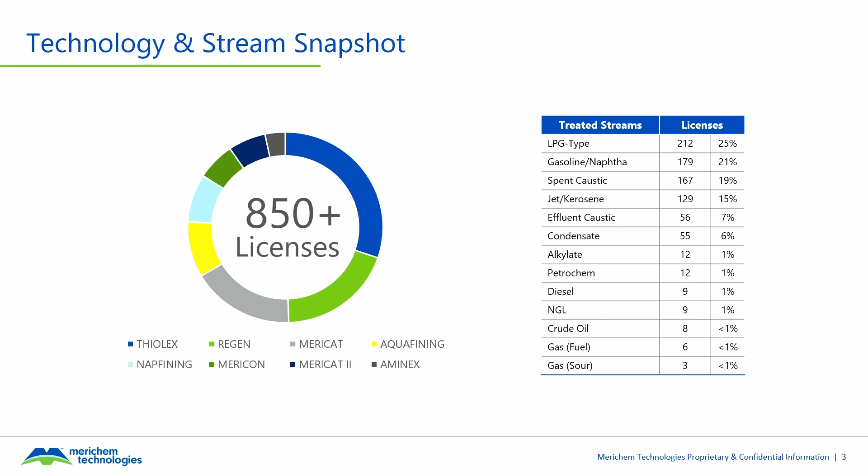To date, we have over 850 licenses spread across the world. These technologies include Thiolex, Regen, Mericat, Aquafining, Napfining, Mericat 2, and Aminex. Most of these are extraction or sweetening processes built around our fiber film contactor. Our entire portfolio consists of about double the technology that you see listed here, but these 8 are most suitable to the African continent.

Thiolex and Regen, as you can see, are the most dominant. They represent half of the licenses that we've issued to date, and they are complementary. Thiolex is going to extract mercaptans into caustic, which will then go over to the caustic regeneration technology, Regen, to regenerate it for continuous use.

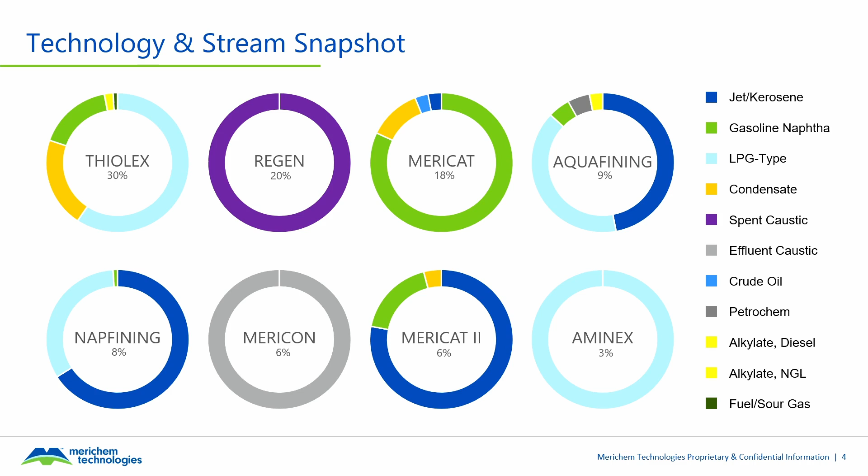We flexibly apply these technologies across 13 major feed types that you see listed here. The LPG stream is the largest share, followed by kerosene, jet fuel, gasoline, and so on. The pie charts here also show how these licenses are distributed among both technologies and the feedstocks. A key point: extraction is going to dominate in the lighter fractions of hydrocarbon, while sweetening dominates in the heavier fractions, such as jet fuel and condensate. We use aquafining on jet fuel, and Mericon is used to neutralize effluent caustics for safe disposal.

This global reach shows the breadth of adoption and sets the stage for Africa, where we believe the same trajectory of growth is possible, much like what the shale gas revolution did in the US, and now similarly 10 to 15 years later in Canada.

Okay, now let's shift gears and look at how the magic happens.

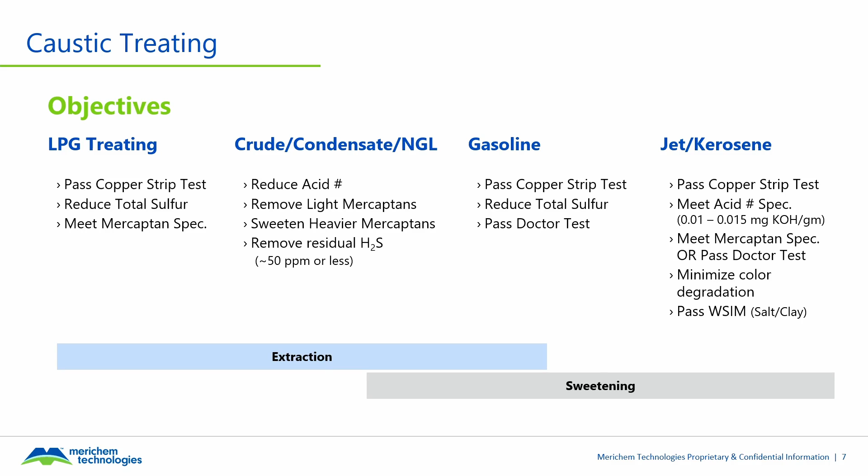Depending on the hydrocarbon fraction, the treatment objectives will vary. For LPG, the key specs we're trying to meet include copper strip, total sulfur, and mercaptans. For distillates, naphthenic acid comes into play along with mercaptans. For gasoline, we're going to touch on copper strip, total sulfur, and the doctor test. And finally, for jet fuel and kerosene, we're going to be looking at copper strip, acidity, mercaptans, and color.

As the fractions get heavier, once again, extraction alone is not enough. We must combine extraction and sweetening, and eventually rely mainly on sweetening to sweeten up the heavier mercaptans, up to and including an impregnated carbon bed.

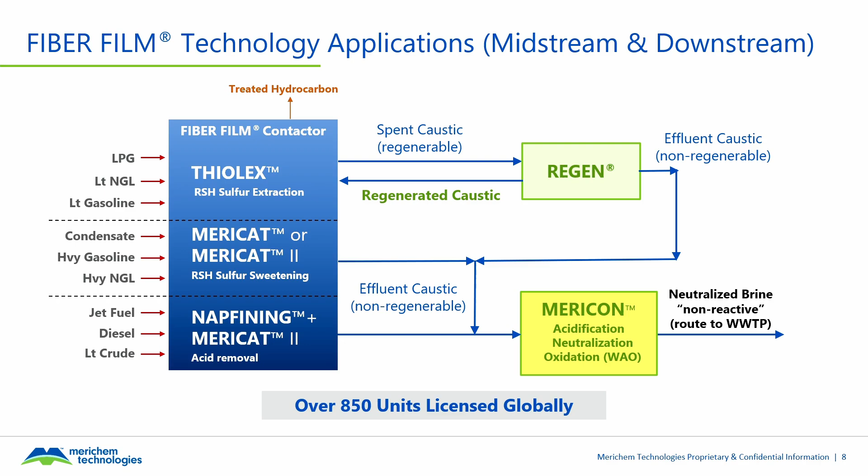Here we see a simplified refinery schematic with the typical refinery products on the left-hand side coming into the Merichem technology block. Each fraction from LPG to diesel to crude oil can be treated with our technologies.

Thiolex handles extraction in the lighter fractions. Regen regenerates the caustic that has extracted the mercaptans. Aquafining is used to remove entrained caustic, primarily from jet fuel. Mericat and Mericat 2 are used to sweeten heavier mercaptans. And Mericon is a technology we use to either neutralize, acidify, or oxidize effluent caustics.

Now hear this: Merichem is the only licensor capable of treating crude oil. So if you have a crude oil stream, we can treat it directly with the fiber film contactor as well.

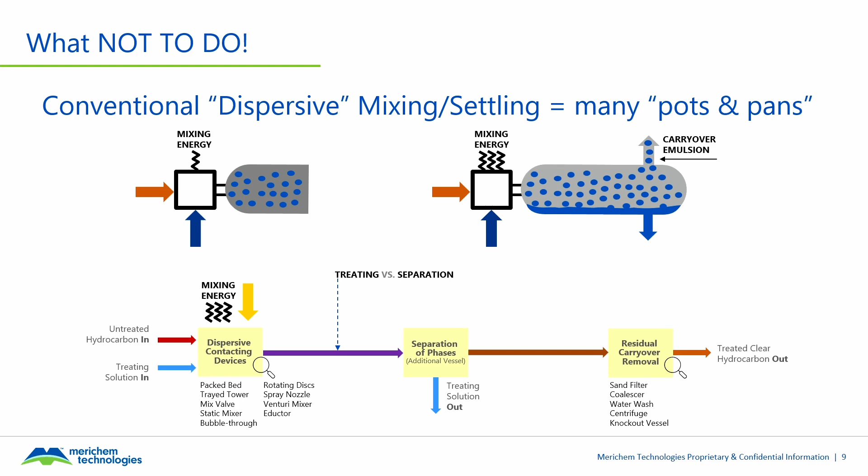So if you look at the bottom half, you see the dispersive mixing devices, and in the middle you have the separation. All of this extra equipment we don't need with the fiber film contactor because we don't disperse caustic or amine as droplets, so we don't have to separate them again.

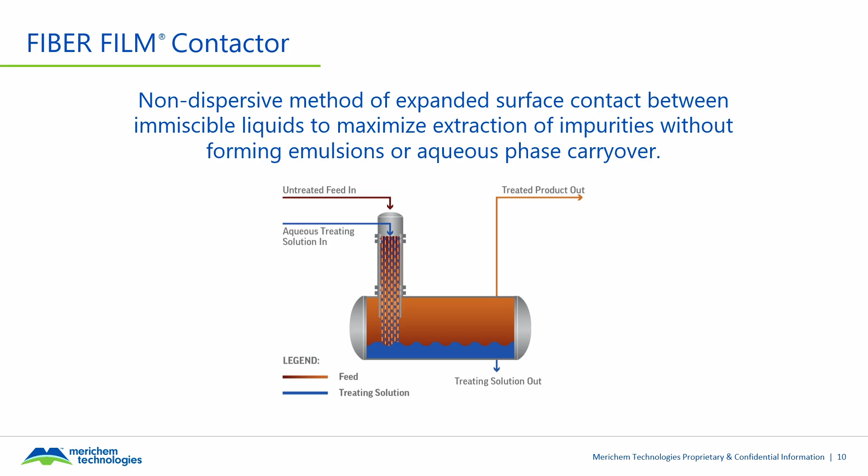So how do we do this? With the fiber film contactor. We take that same droplet, those blue droplets, and instead of freely releasing it into the hydrocarbon, we suspend it on a fiber. The fiber film contactor is like a ponytail. The caustic wets the fiber, the hydrocarbon flows in between the wetted fibers, so we press the two layers up against one another, and that's how we extract the impurity and get the interfacial area we need.

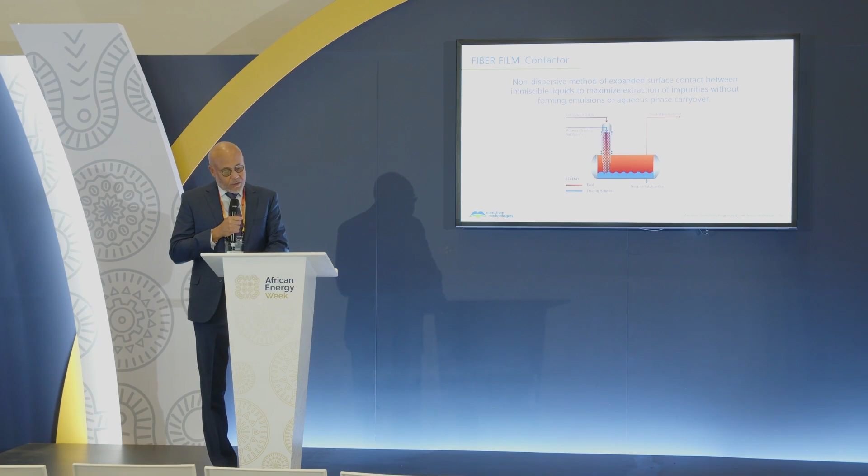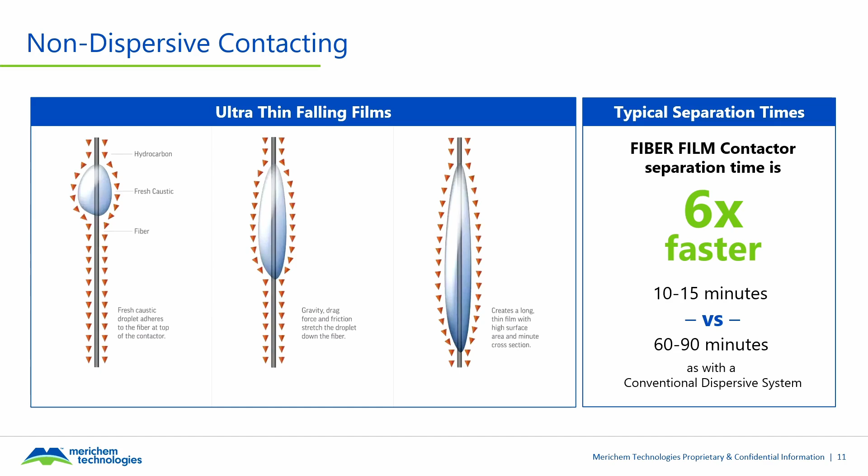As a result, we achieve very efficient mass transfer, 80 to 90% plus of theoretical stage efficiency. Residence times with conventional dispersive systems are typically 60 to 90 minutes, versus the Merichem vessels with fiber film, 10 to 15 minutes with our classic fiber film contactor. The next gen fiber film contactors we have now actually reduce residence time to 5 to 10 minutes - again, without dispersive mixing.

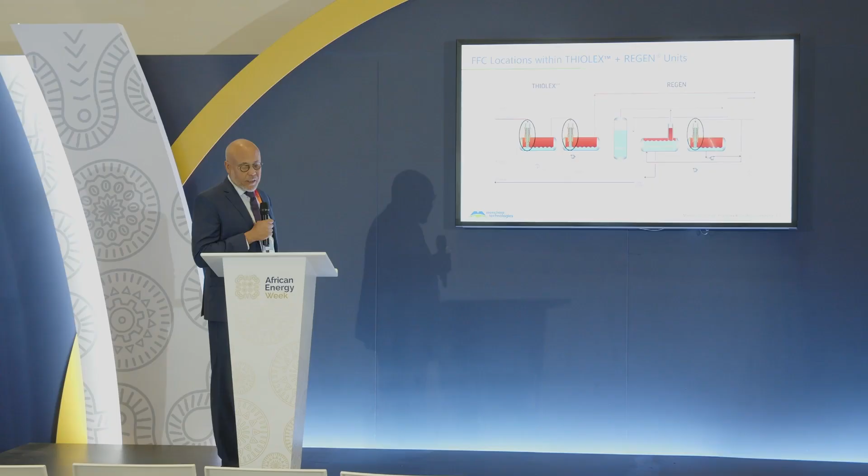All right, so this process flow diagram highlights the heart of our technologies. The Thiolex-Regen is our bread and butter - that's 50% of the licenses we've issued worldwide. The Thiolex section on the left-hand side is where we extract the impurities from the red hydrocarbon into the blue caustic.

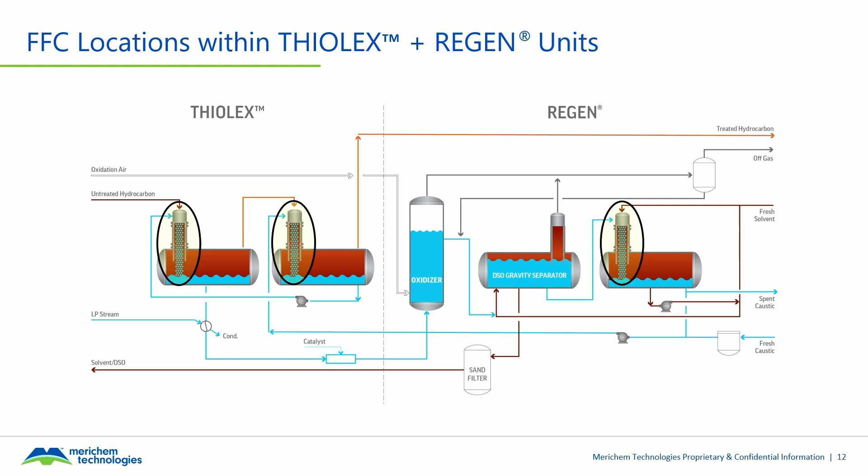Then you can see we add heat, catalyst, and air in this oxidation tower, and that's where we generate from the mercaptans what's called disulfide oil - a sulfur oil. The DSO gravity separator is a bulk separation of this disulfide oil from the oxidized caustic, because we're going to take a next step.

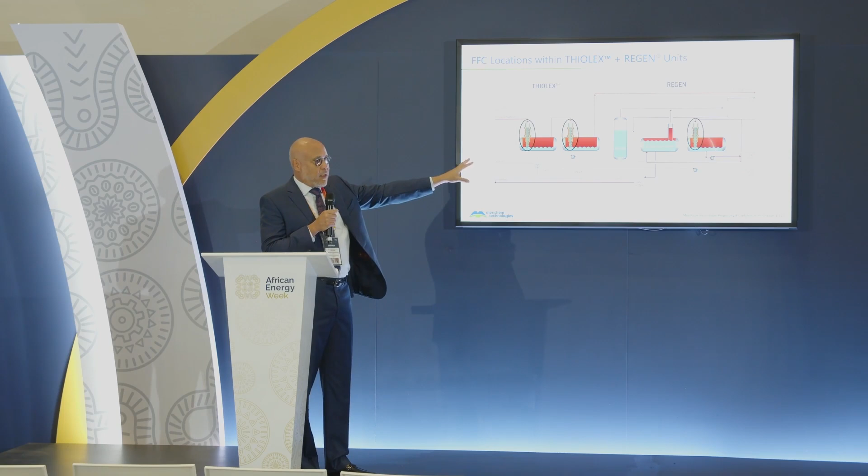We can solvent wash as well if you need to really polish the caustic for the DSO, because if you don't take it out and you return it, it will get back absorbed into your product. So depending on how much sulfur you have to remove from the hydrocarbon and what your product specification is, that determines to what degree we have to remove the DSO from the caustic.

But full cycle, you see a continuous operation with minimal entrainment and also full caustic recovery.

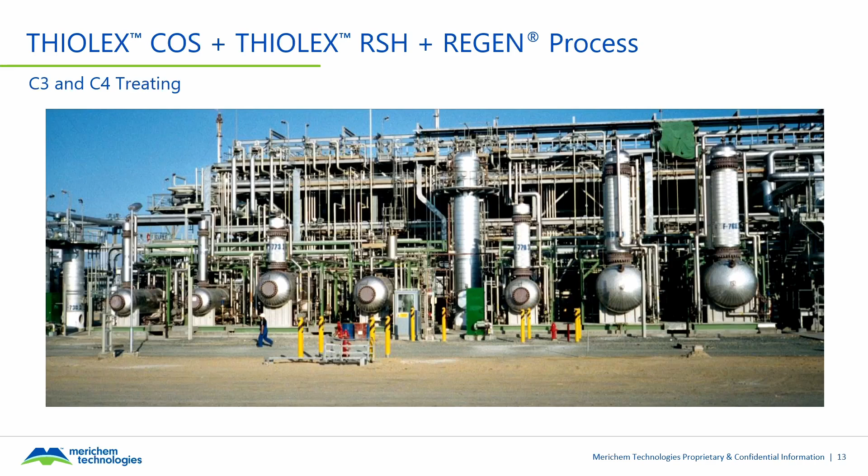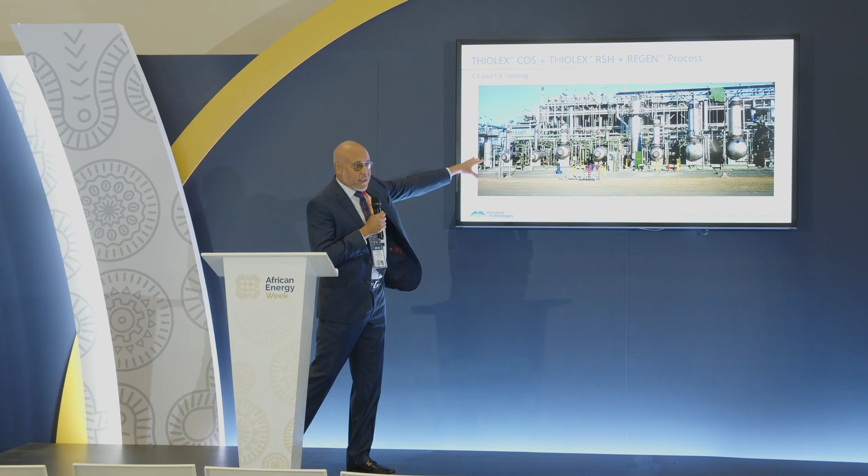At this point, let me show you some pictures as well - this is what it looks like in the real world. The two on the left are the Thiolex vessels. The oxidizer tower is here in the middle, and then you have the DSO separator to the right of the oxidizer tower. To the right of that would be a solvent wash. This particular unit is actually treating propane and butane. It has a COS removal step, which we can add - that's optional. But that's what it looks like in real life.

So now I'll turn it over to my colleague Lance. He's going to pick up to discuss LO-CAT and SULFURTRAP. All right, thank you, Malcolm.

Today I'm going to discuss H2S removal from sour gas streams utilizing our SULFURTRAP fixed bed adsorbent technology, and also LO-CAT technology.

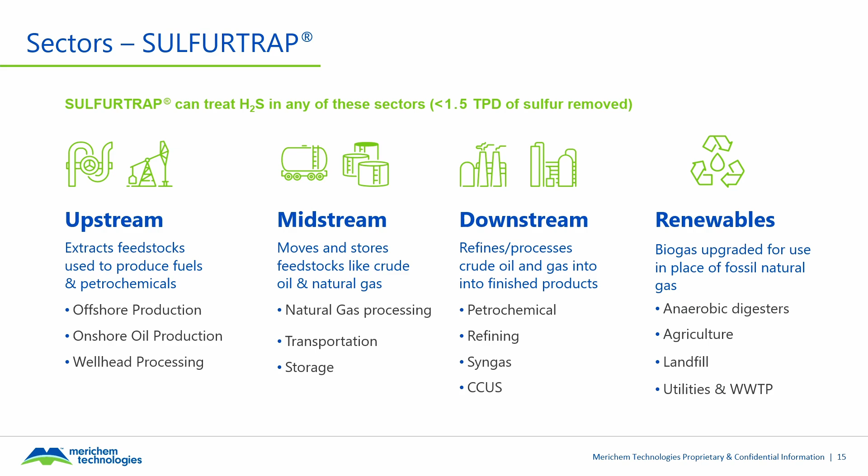First up, I'm going to talk about SULFURTRAP. Sulfur trap generally fits well for streams that consist of less than 1.5 tons per day of sulfur. SULFURTRAP is applicable towards a wide variety of different sectors, including upstream onshore and offshore production, midstream natural gas processing, transportation and storage, downstream petrochemical refining, syngas, carbon capture, and also renewables, anaerobic digesters, agriculture, landfill, and utilities and wastewater treatment plants.

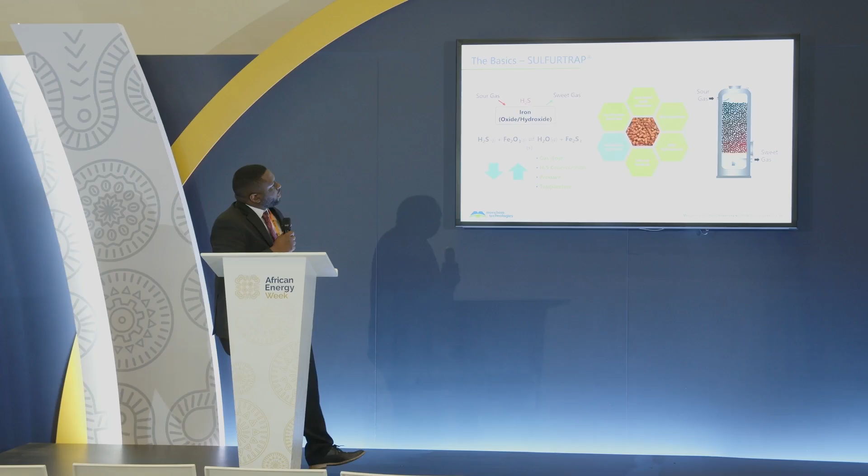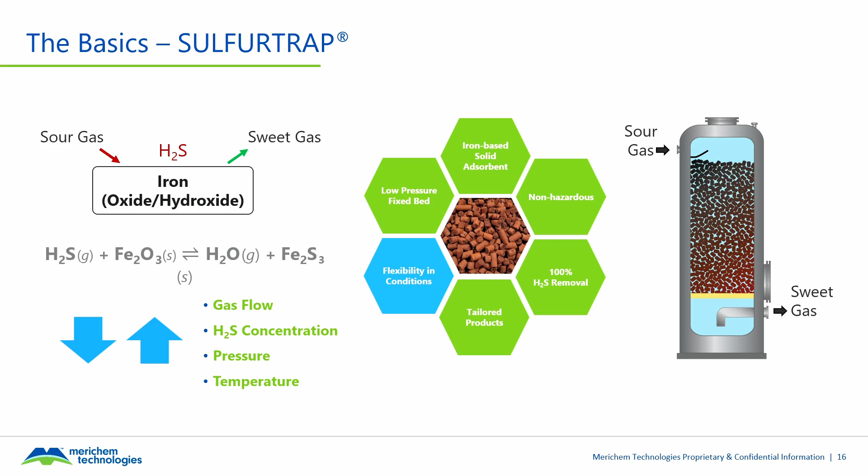So the basics of sulfur trap: the sour gas flows in through the top of our sulfur trap vessel, which flows over a bed of media and exits the bottom of the vessel containing less than 1 ppm of H2S. As the sour gas flows over the media, the H2S reacts with the iron oxide, producing iron sulfide. As I mentioned, generally our sweet gas contains less than 1 ppm of H2S.

One thing that's really good about sulfur trap is it's very flexible in terms of conditions - gas flow, H2S concentration, temperature, and pressure are also very flexible there. In addition, some of the advantages of sulfur trap are a low pressure drop and also being considered non-hazardous.

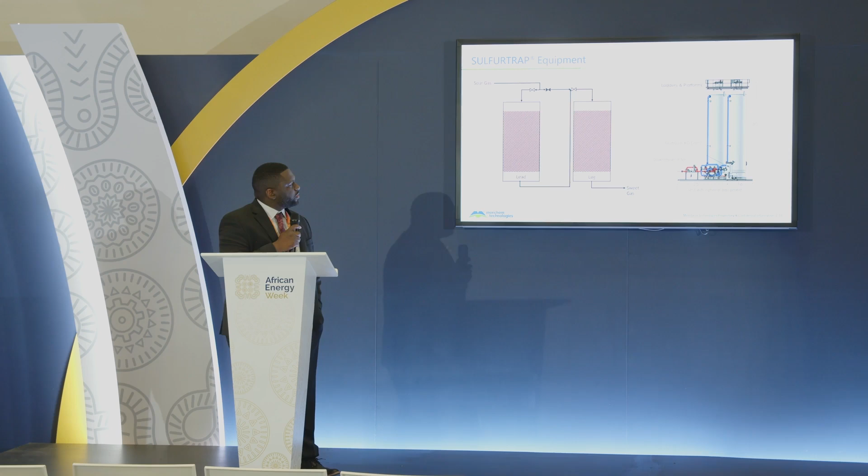In addition, the lead-lag design also ensures that we consistently meet product spec in the sweet gas. Off to the right side, you can see a 3D image of our SULFURTRAP unit. It consists of an upstream knockout pot, our double vessel lead-lag design, and also a downstream filter.

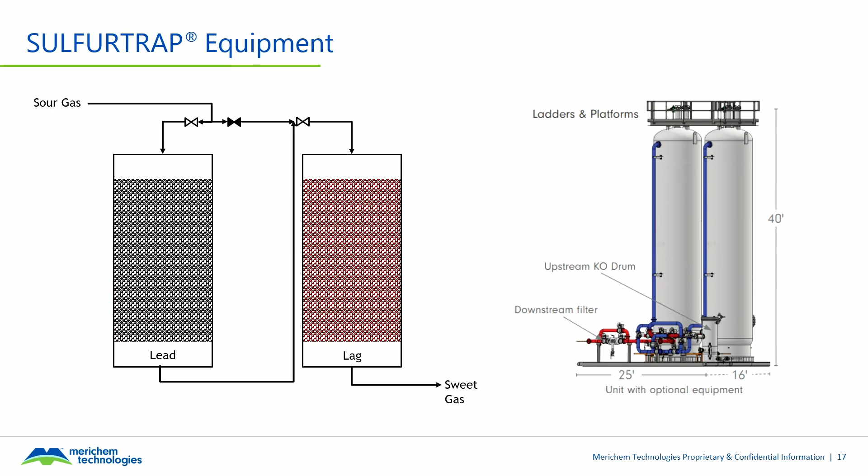This is just a little illustration of a change out of the adsorbent and how we would divert the sour gas throughout the vessel.

Now I'm going to talk about our liquid oxidation catalyst technology, or better known as LO-CAT. LO-CAT generally fits well for sour gas streams that consist of 1.5 to 20 tons per day of sulfur. So it fits really well between the adsorbent technology and also the Claus units, and this is based on OPEX and CAPEX.

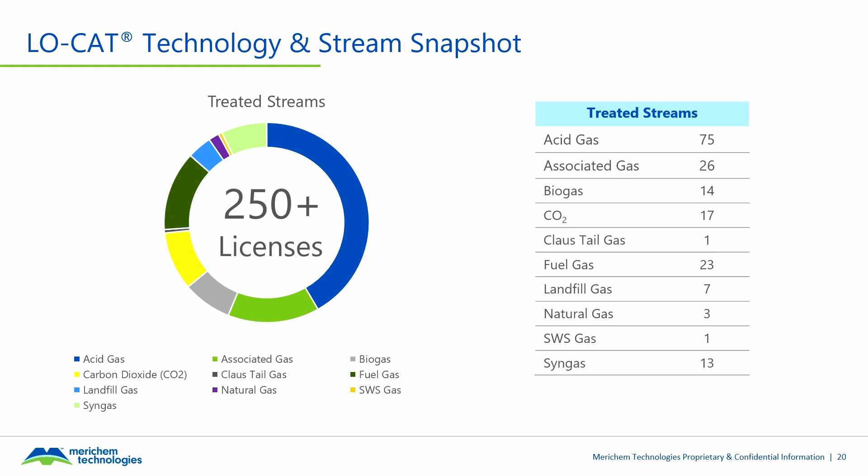Here, Merichem has over 250 licenses worldwide. Our treated or primary treated gas streams are acid gas, in addition to associated gas and biogas, and fuel gas as well.

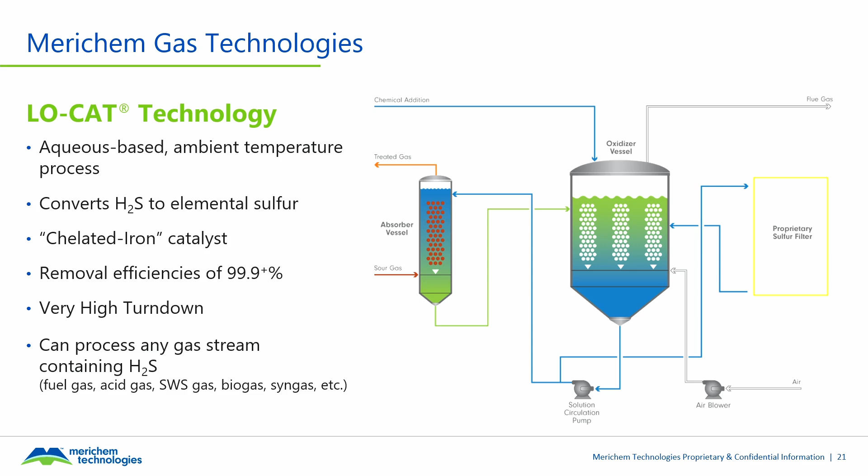LO-CAT is an aqueous-based ambient temperature process that converts H2S to elemental sulfur, utilizing chelated iron catalysts, and has removal efficiency of 99.9% of H2S from the sour gas stream. It also has a very high turn-down rate, and we can process any gas stream containing H2S - fuel gas, acid gas, sour water stripper gas, biogas, syngas, and many more.

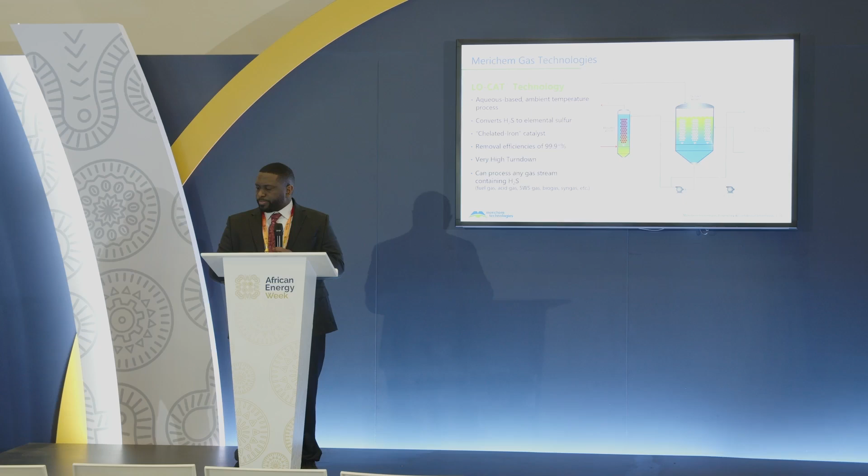Our LO-CAT technology consists of an absorber, an oxidizer vessel, and also our proprietary sulfur filter. The sour gas enters in through the bottom of the absorber and flows out as sweet gas from the top. As the sour gas flows through the absorber, H2S is absorbed.

H2S is absorbed by our LO-CAT solution, which then converts the H2S to elemental sulfur. That elemental sulfur and LO-CAT solution then flows over to our oxidizer vessel, where the LO-CAT solution is regenerated and sent back over to our absorber to be reused in the process.

There's a slipstream that also flows over to the proprietary sulfur filter, and from there that produces our sulfur cake, which can be used in various areas such as fertilizer or sulfuric acid production.

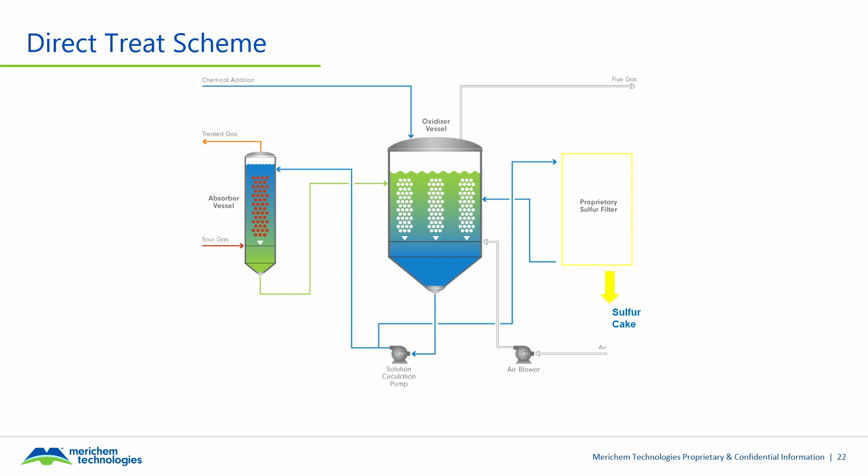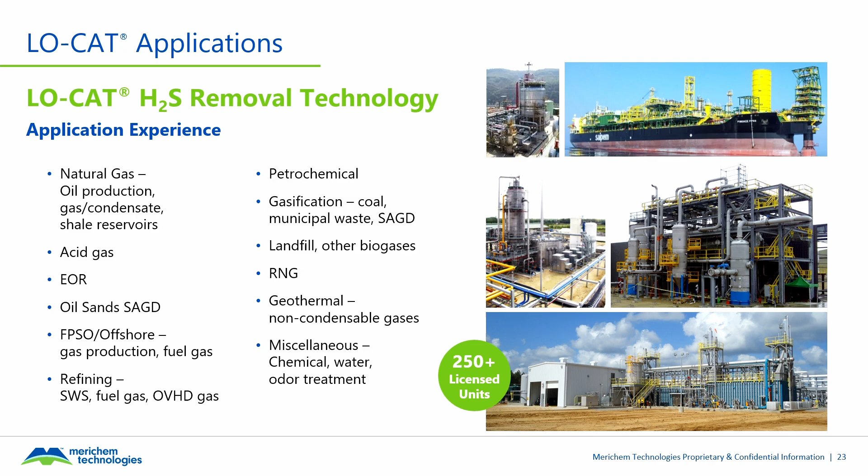LO-CAT application experience: here at Merichem, we've got experience ranging from natural gas, acid gas, FPSO, offshore gas production, fuel gas, refining, sour water, fuel gas, overhead gas, petrochemical, gasification, landfill and other biogas, and geothermal non-condensable gases. As I mentioned, we have over 250 licensed units worldwide.

Okay, I'll take a couple minutes here to wrap up before we take any questions, if there are any. So we didn't have a lot of time today to cover the many technologies that we have.

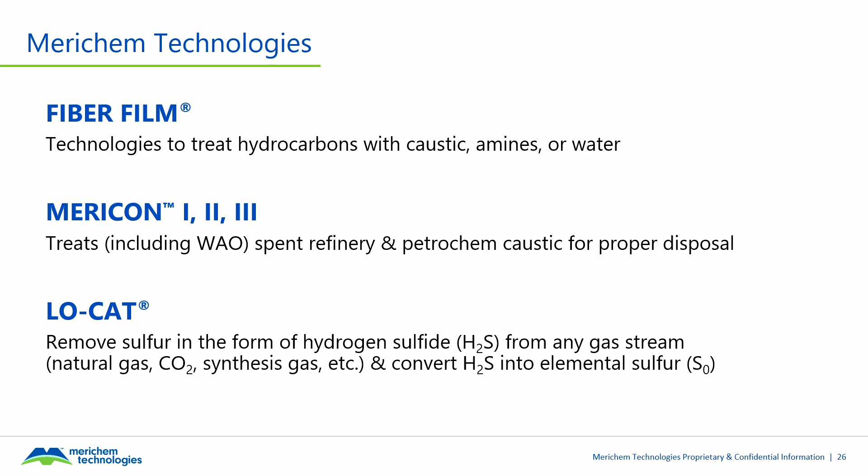All of these are licensed technologies involving a license fee, a paid-up license fee: Fiber Film, which we've covered extensively, the MERICON technologies, which treat effluent caustics and make it safe to dispose of, and LO-CAT, which Lance just gave us a presentation on.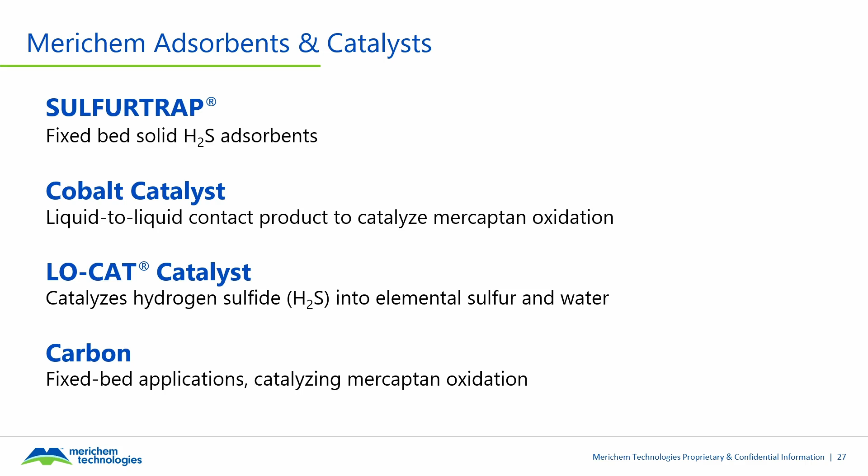And then we round out our offering with our catalysts and adsorbents. Again, SULFURTRAP, which Lance presented on, and then we have the catalysts that go along with our Fiber Film and LO-CAT processes. And then finally, we offer carbon beds as well, primarily for jet fuel treating.

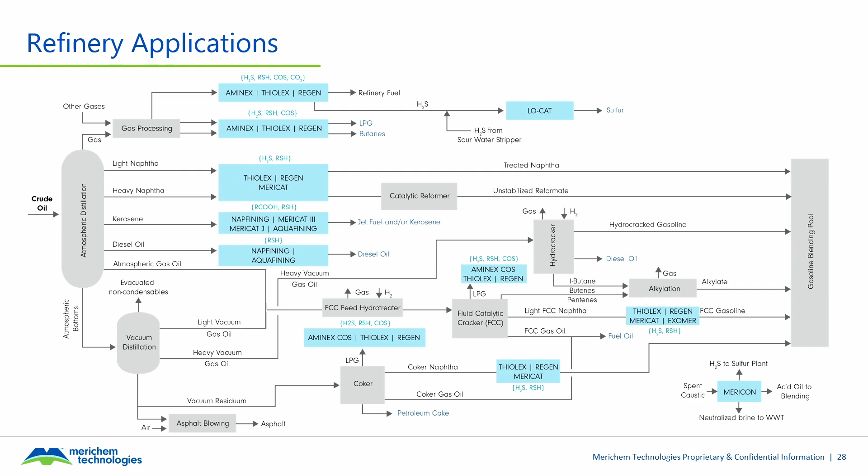Here's a simplified refinery diagram, this time showing some of the refinery ops. In the blue, you're going to see where the Merichem units are inserted for treatment, and in light blue above the boxes, you see the impurities that we're able to remove with these various technologies and technology combinations.

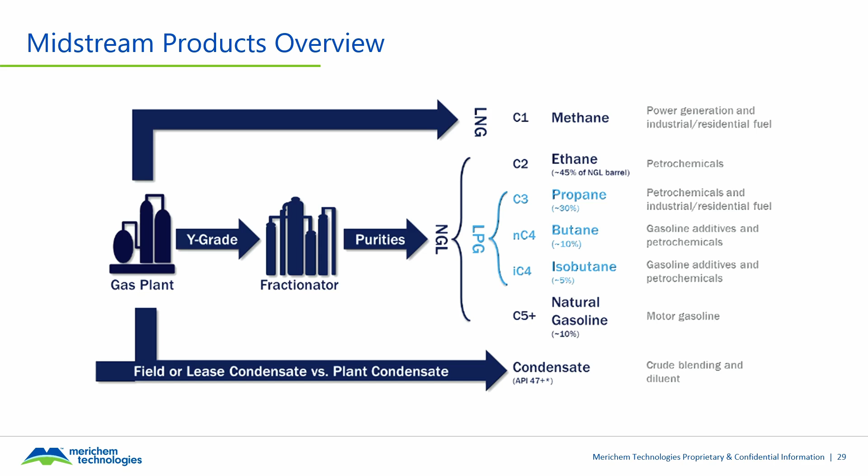This one gives an overview of a typical midstream product sector, you know, methane all the way down to natural gasoline and condensate. Starting with propane on down is where the Fiber Film technologies would apply, and then for methane is where LO-CAT applies.

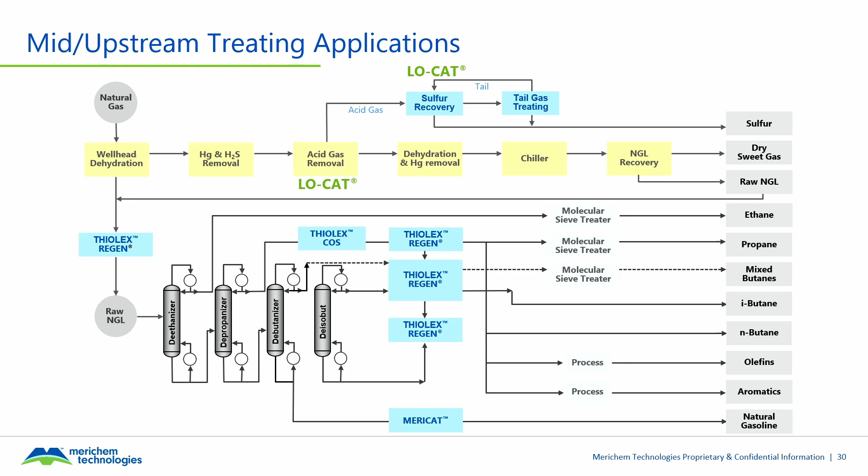So we see that here on the next slide. This is, again, another shot of the midstream, and in this case, we're actually showing you some of the fractionation equipment. Again, the blue boxes are the Merichem technologies and where they would apply in this midstream process.

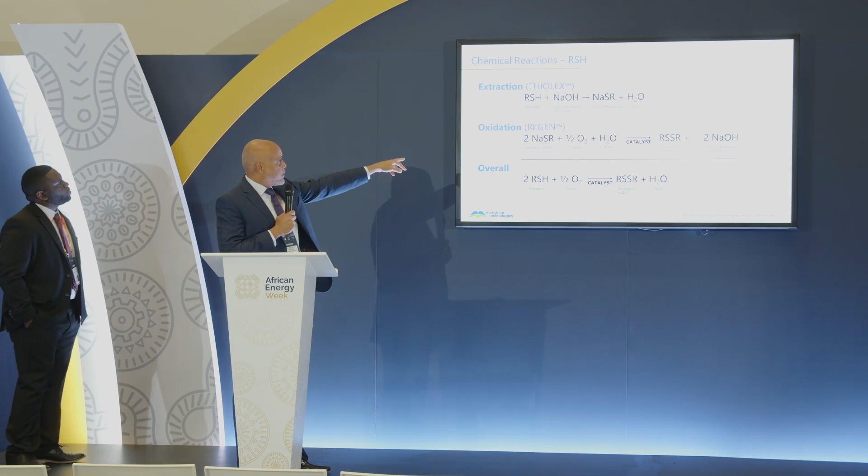This slide here is just going to show you the Thiolex reactions. This is actually where, with caustic, RSH is the mercaptan, and we're going to create that sodium mercaptide. Now we're going to bring that sodium mercaptide in the caustic over to the oxidation section that we mentioned before. That's where we're going to add the air, oxygen via air, catalyst, there's some heat added, and what you see is you 100% regenerate NaOH.

So you fully regenerate your caustic, and the overall reaction is the combination of the extraction and oxidation. And then you see here on the bottom line, you convert mercaptans all to DSO, and you make a little water, but you fully regenerate the caustic, so there's no caustic consumption. You just dilute the caustic batch over time.

This overall reaction is also reflective of our MERICAT technologies, because in the MERICAT technology, we do everything in one vessel. We oxidize, create the disulfide oil, and in that same vessel, it goes right into the hydrocarbon. So that is not an extractive process, it's a sweetening process, because we just go from mercaptan to disulfide oil, which is much less volatile, and you don't have the odor.

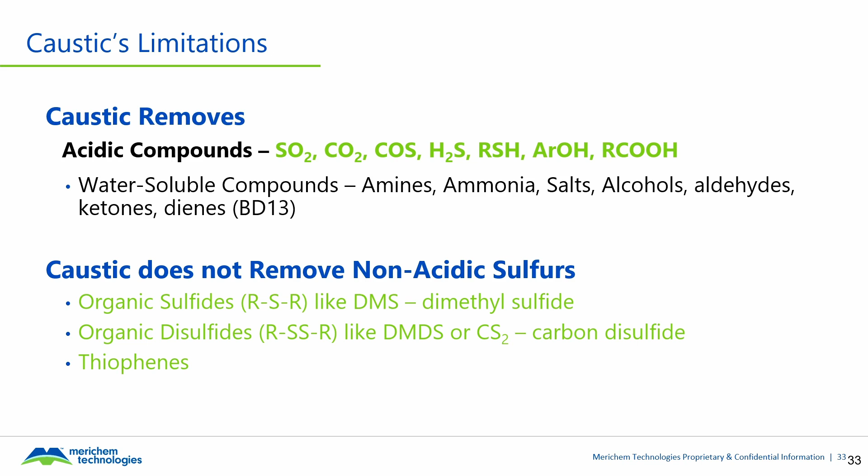Okay, this will be the last slide of the appendix, more about caustic. You see at the top what we can use caustic to remove as far as these various impurities, but at the same time we've given you some limitations of caustic, such as non-acidic impurities, sulfur impurities such as organic sulfides and disulfides, and thiophene. We can't touch those with caustic. Unfortunately, that's a much more expensive proposition known as hydrotreating.

So I believe that's the last slide. In closing, we'd just like to say that we know that Africa has vast hydrocarbon resources that can and should be upgraded locally. The transition that we see will require propane, butane, gasoline, jet fuel, and diesel produced here in Africa, not imported. Our technologies have been proven worldwide, and we are eager to partner in bringing that capability here on the widest scale possible.

And again, we thank you for your time and look forward to any questions and exploring any opportunities to collaborate. And we'll leave you with a new hashtag: Refine Baby Refine. That's the next step. Thank you for your attention.